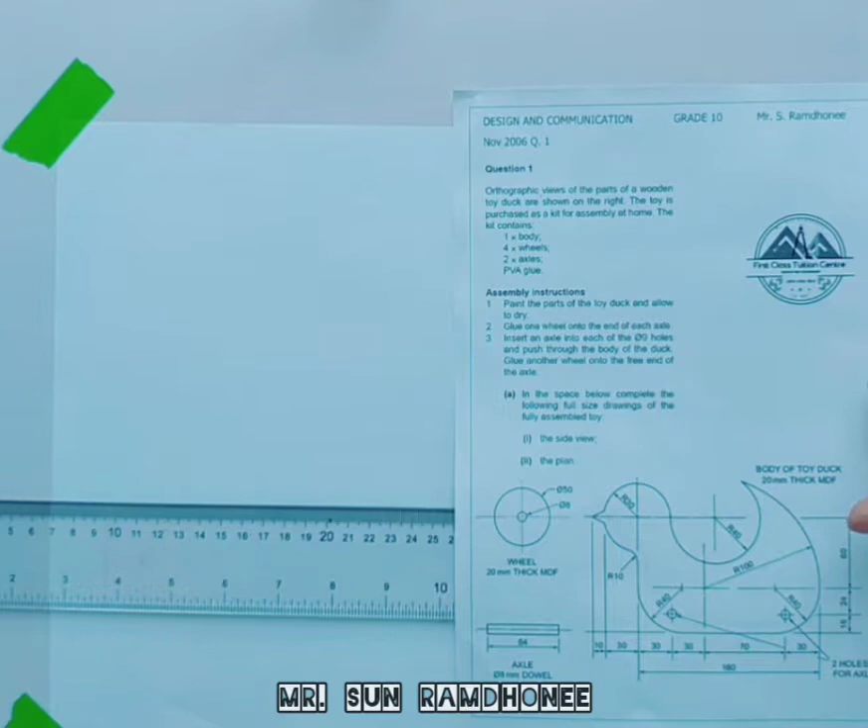In this session we are going to look at a past exam paper. The year is 2006 and the question that we are going to attempt is question 1A. So I'll give you a summary of this question.

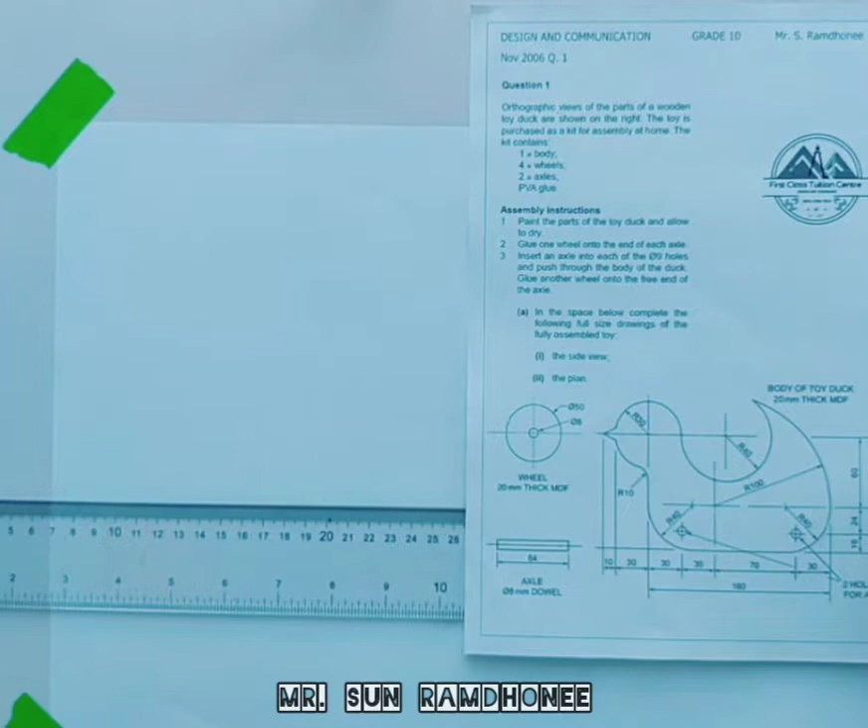You're given a toy and you have to assemble the toy, and the toy is sold as a kit, which means that it will contain the different parts that you have to put together. You have been given the body of the toy duck, you have 4 wheels, and you have 2 axles, and to join the axles to the wheels you have a PVA glue, which is an adhesive.

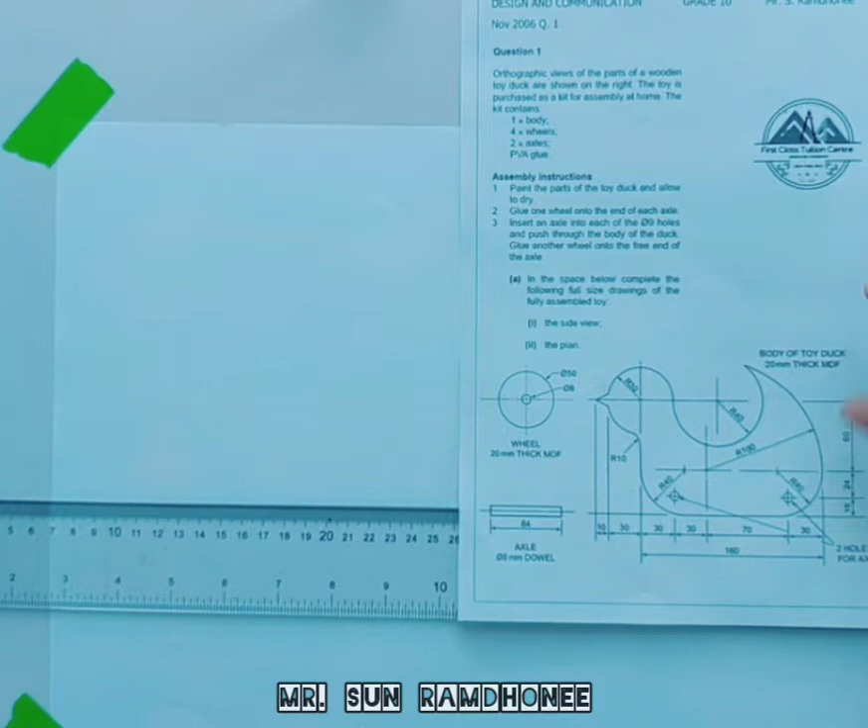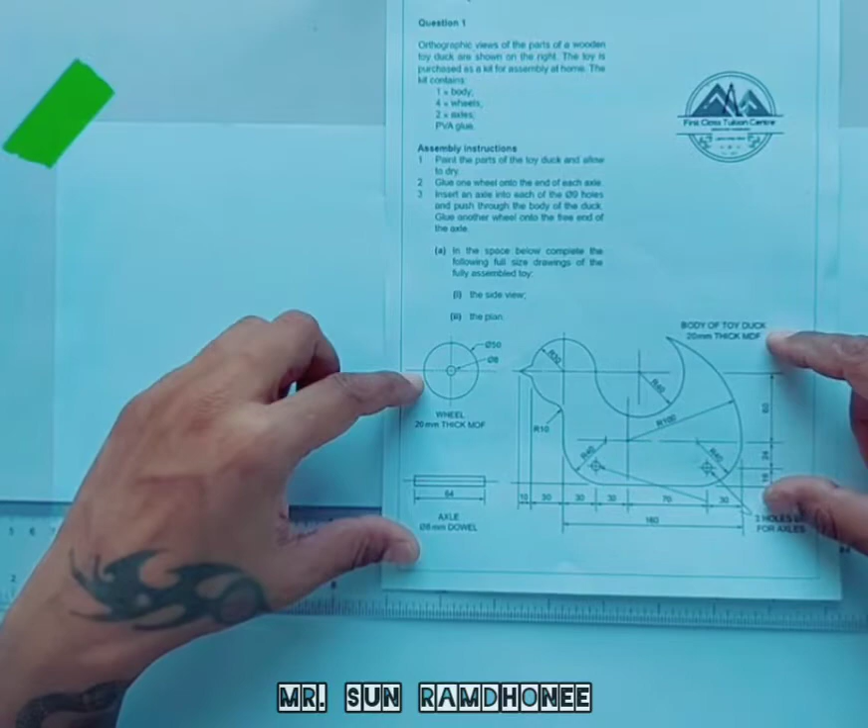So in part A, you have been asked to draw the orthographic views showing the fully assembled toy. This is the side view, and there are 2 holes in which we are going to insert this dowel, and then finally we are also going to insert the wheels at the end of the dowels. We have to show the side view and the top view. Here it is written the plan.

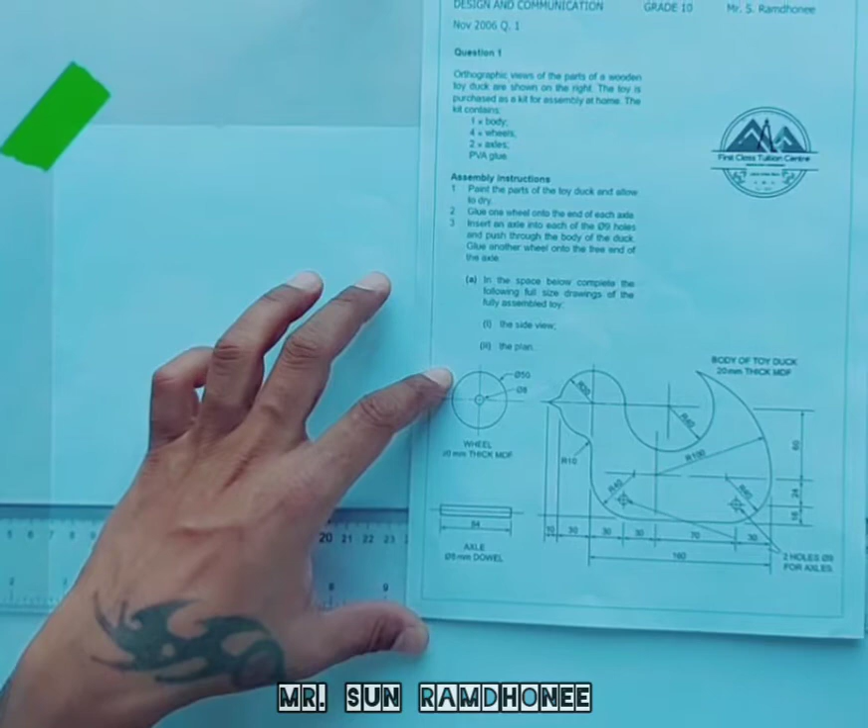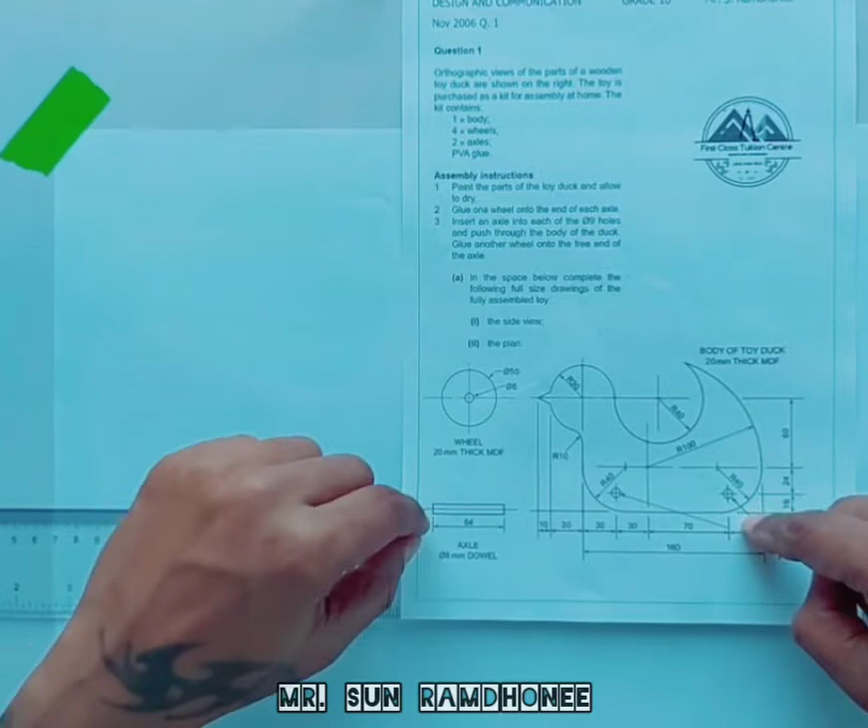In the original question, there is space right below the question. Since I have customized this question so I can print it, we are going to start off with how it was pre-printed in the original question. In the original question paper, you have to start the drawing from this wheel, which means that this wheel should be drawn here, and then we're going to move upwards. There will be 2 wheels which would be mounted on these axles, which should be inserted in these 2 holes.

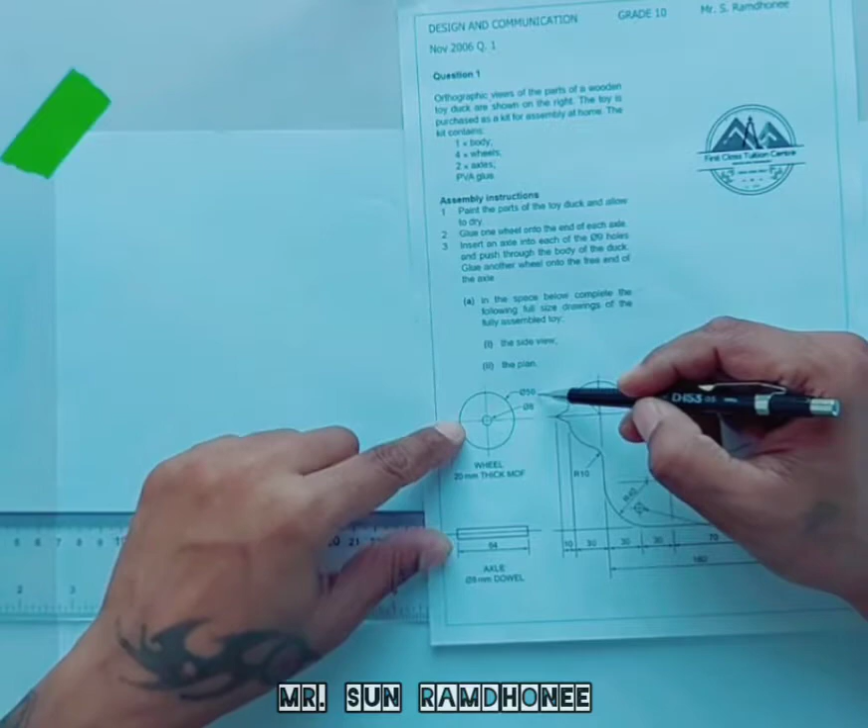So let's get started. First of all, we're going to start off the drawing with the wheel, with this one. The radius for this wheel is 25 since the diameter is 50. So I'll take my compass, I'll measure 25, and then I'm going to draw a center line. This center line is going to be horizontal.

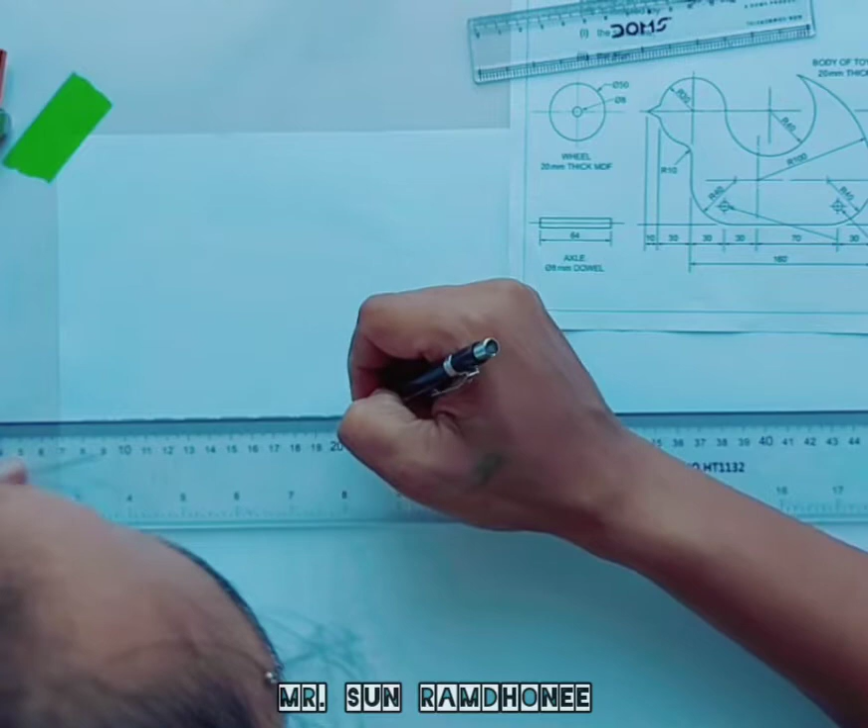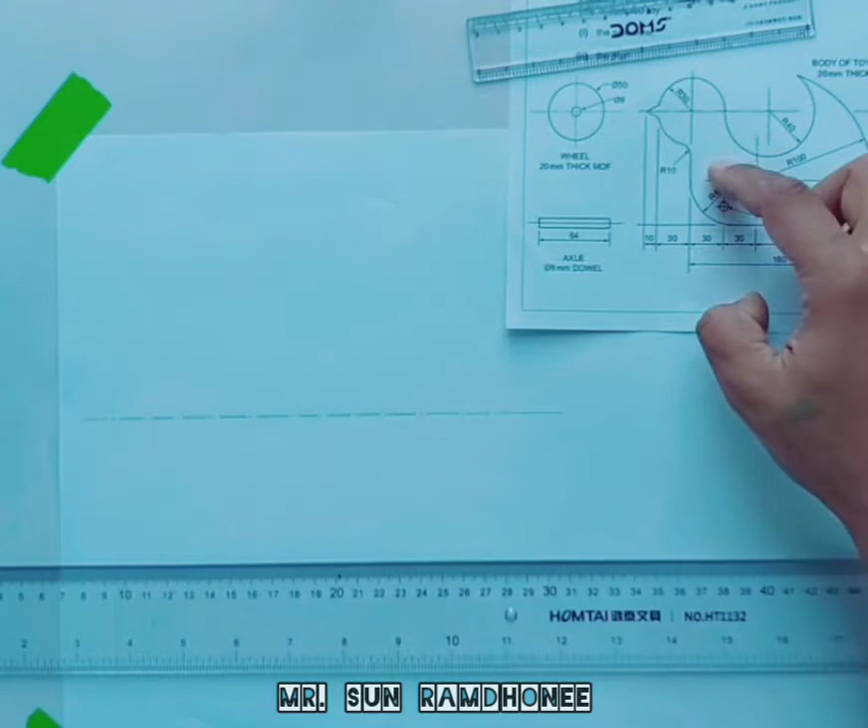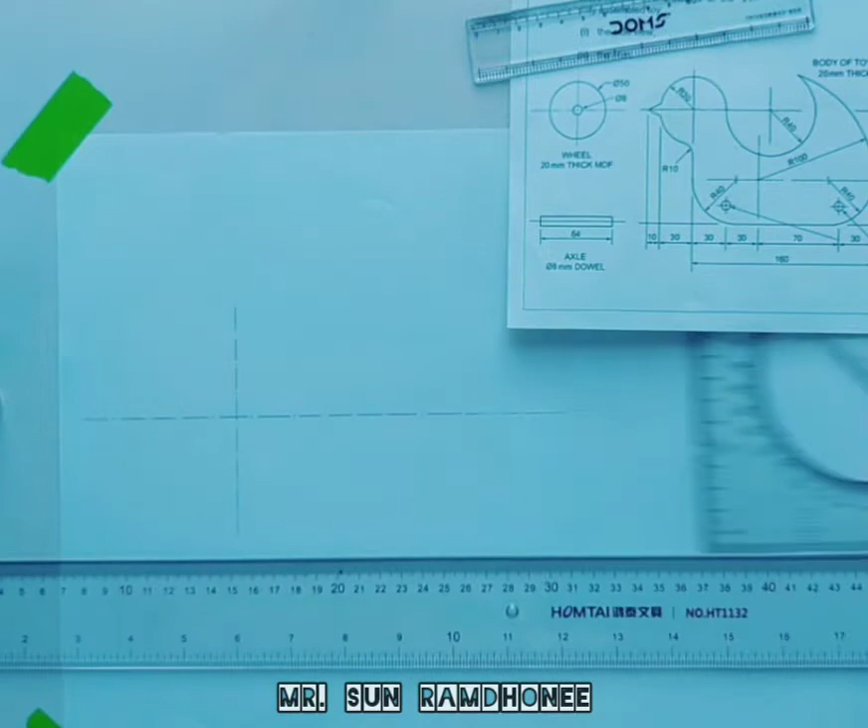Once you have drawn the center line, you have to make sure that you have sufficient space on the left side of the paper, because we're going to draw the wheel here. I have to also draw this part. So I'm going to leave sufficient space, and then I'm going to draw the vertical center line, which I'm going to place around here. And once I have drawn it, this is this point. Now I'm going to draw the wheel here.

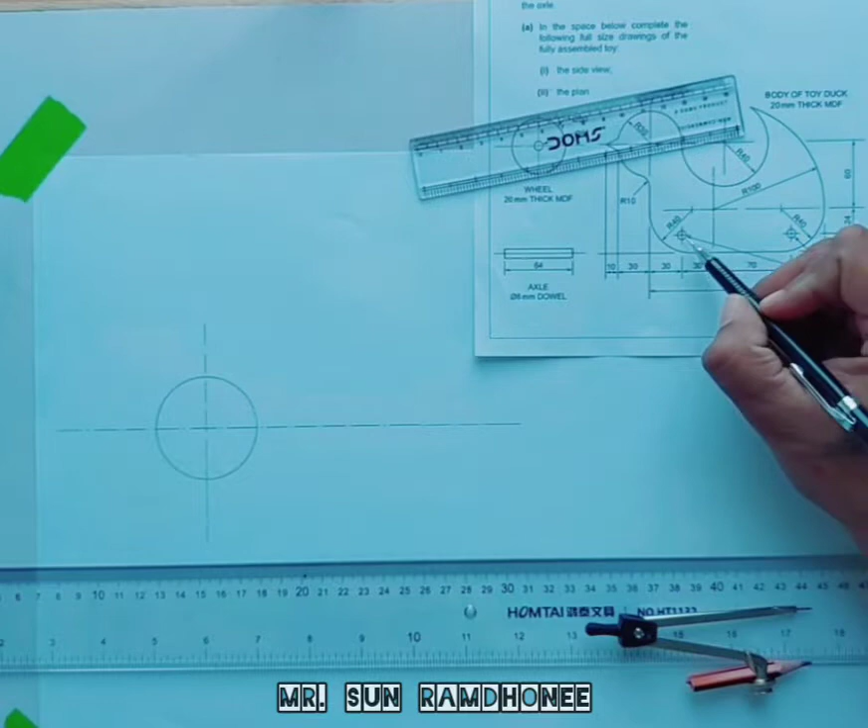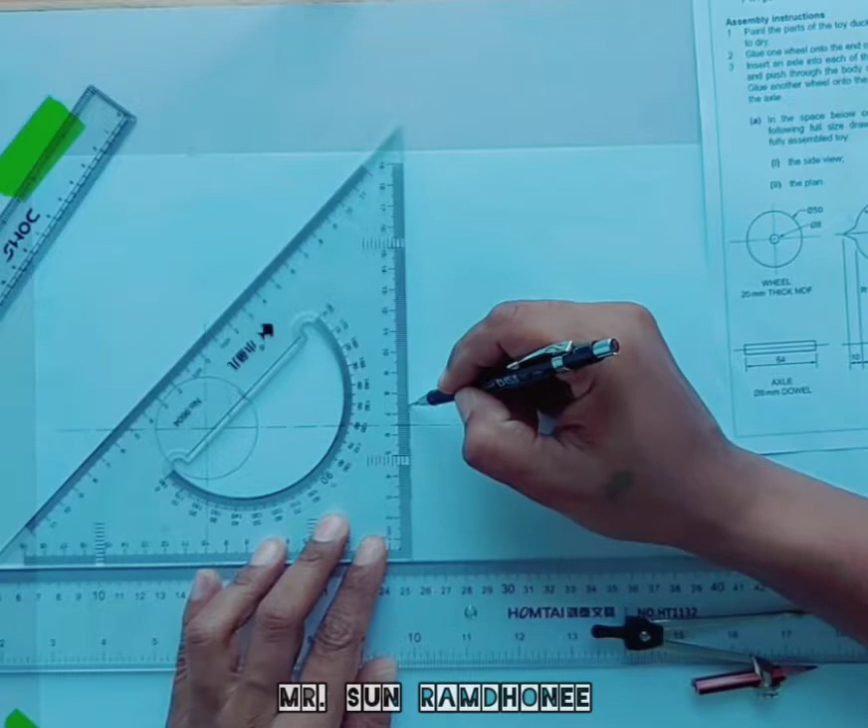The distance between the first wheel and the second wheel is 30 plus 70. So I'm going to measure 100, and I'm going to mark the location for the second wheel, which is going to be here, and then I'll draw the center line. From this center I'm going to draw the second wheel.

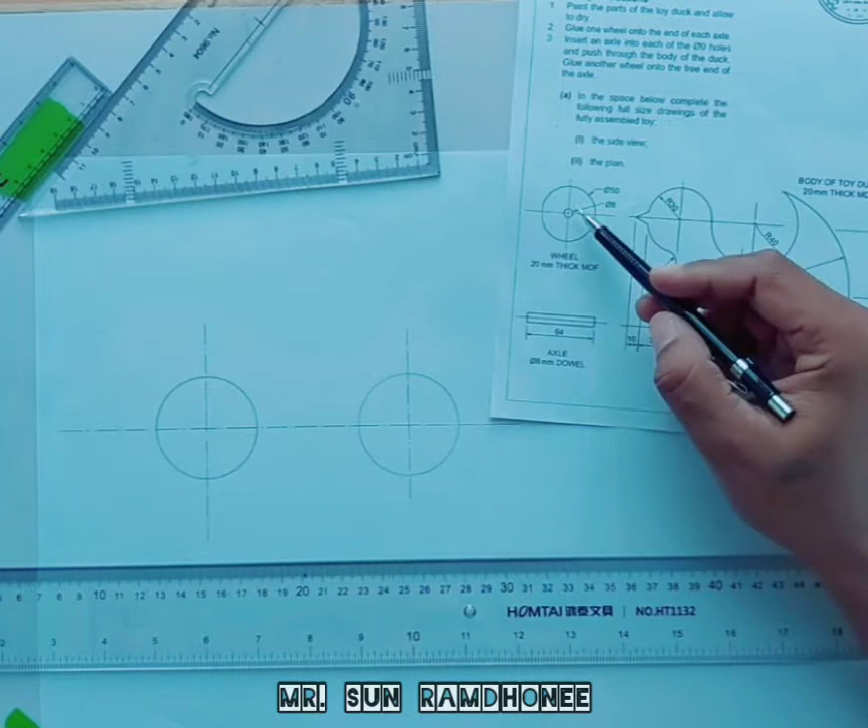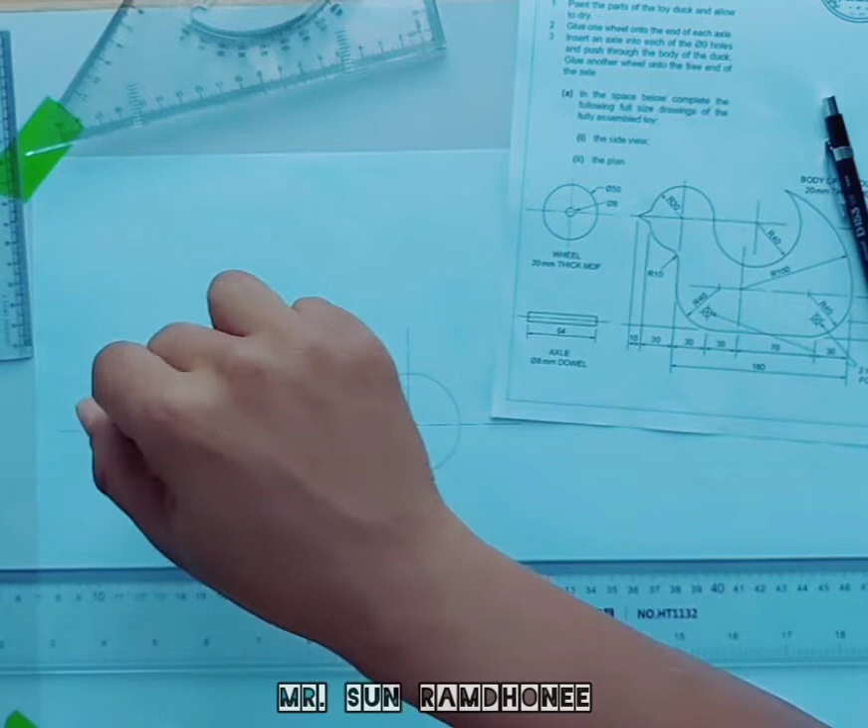Now we have to bear in mind that there is a dowel which should be inserted in this hole. So we're going to draw this circle. The radius is 8 divided by 2, which would be 4. So I measure 4 on my ruler, and then I'm going to draw the circle. One reminder here, you have to take your time to draw the smaller circles, because they tend to get distorted if you go too quickly.

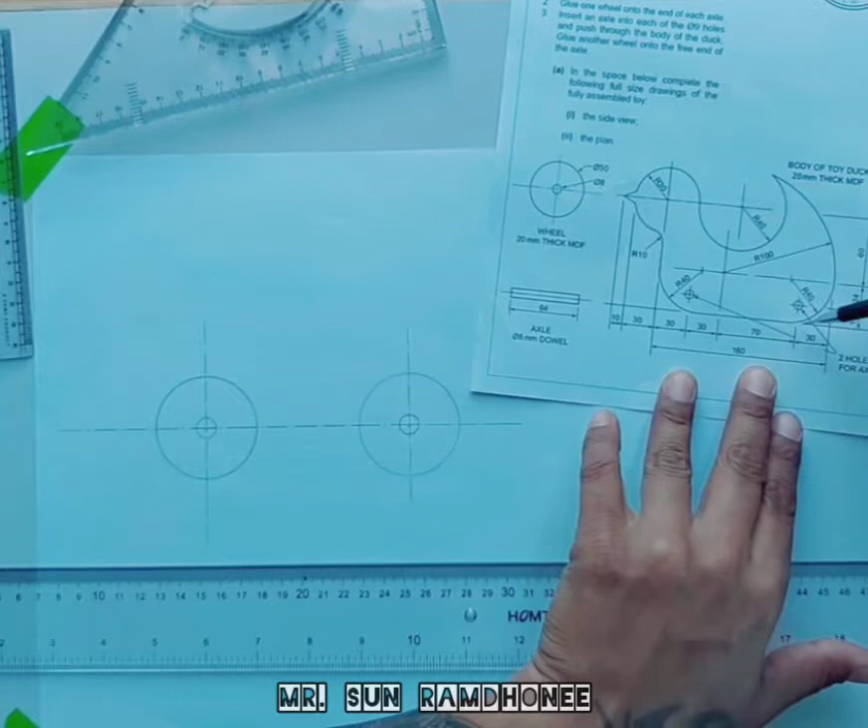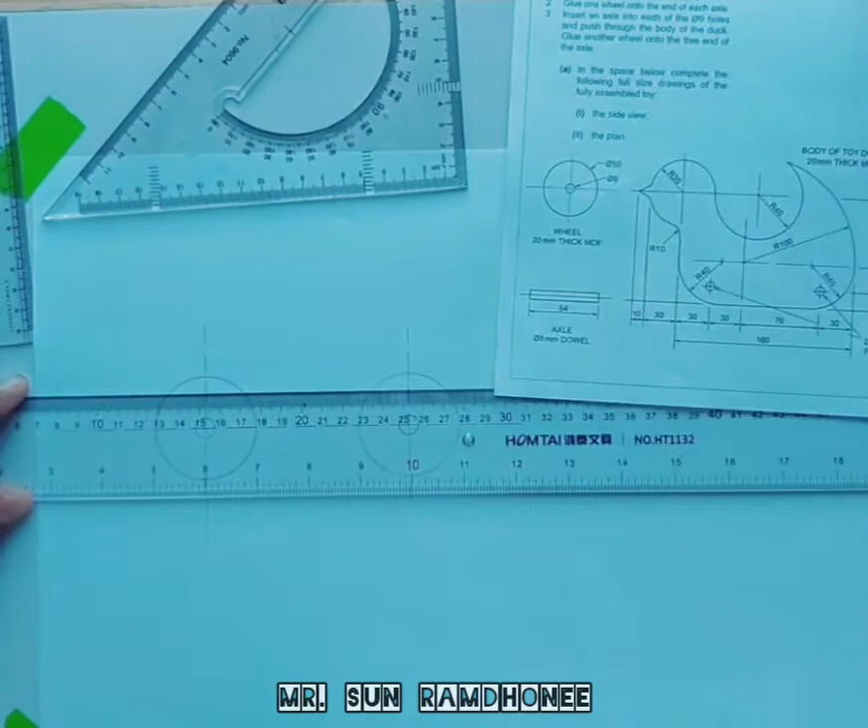Okay, once you have drawn these two circles, we are going to draw this part. The distance from this center till here is 24. I'm going to measure 24 from this point, which lies on this center, and then I will draw a horizontal line here, and this is going to be a very faint line. After drawing this line,

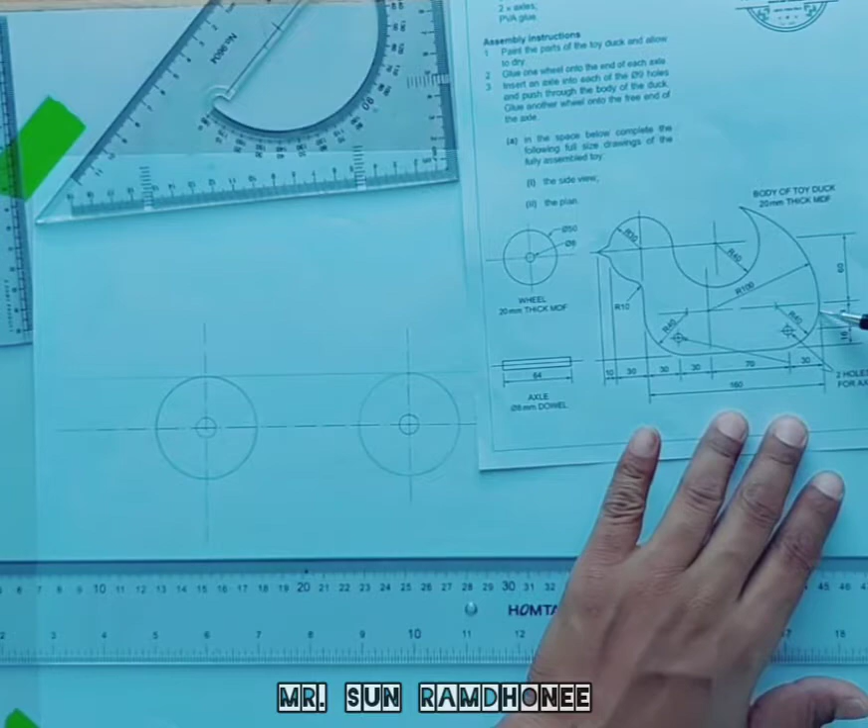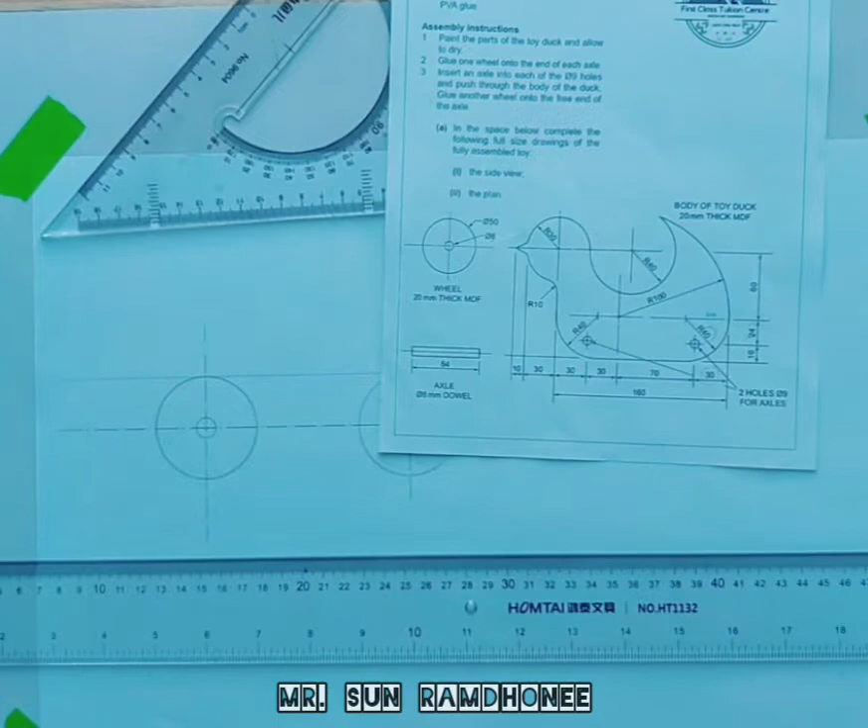I have to measure 30 millimeters from here to locate this center. The distance from this center till this extremity is 30 millimeters. So I'm going to measure 30 millimeters from this center, and then I'm going to draw a very faint line here. Distance from this point till the center is 40, since the radius is 40. So I'll measure 40 here. I will mark the position, the center, which is going to be here, and I'm going to do the same for the left part.

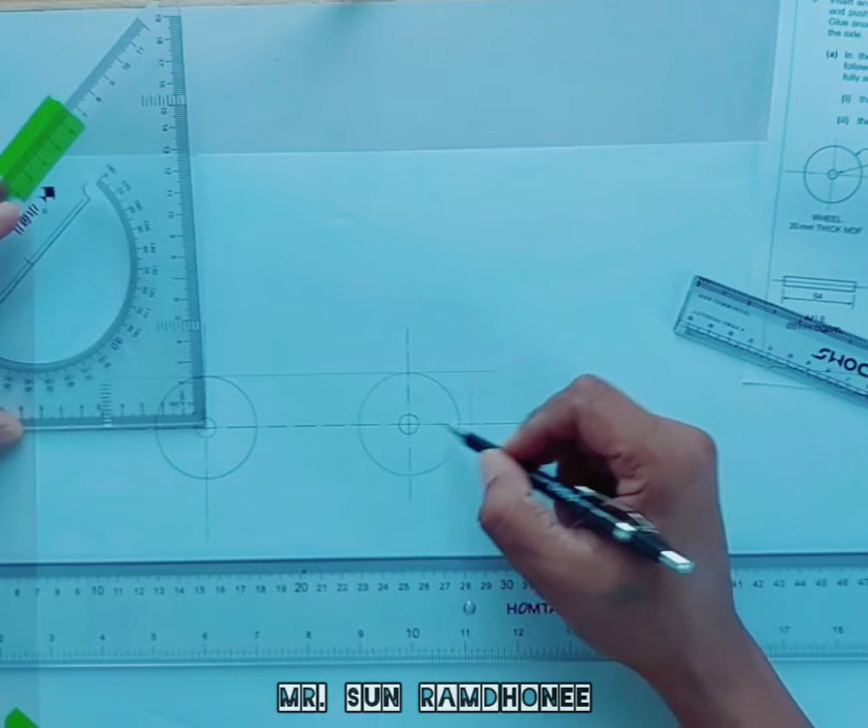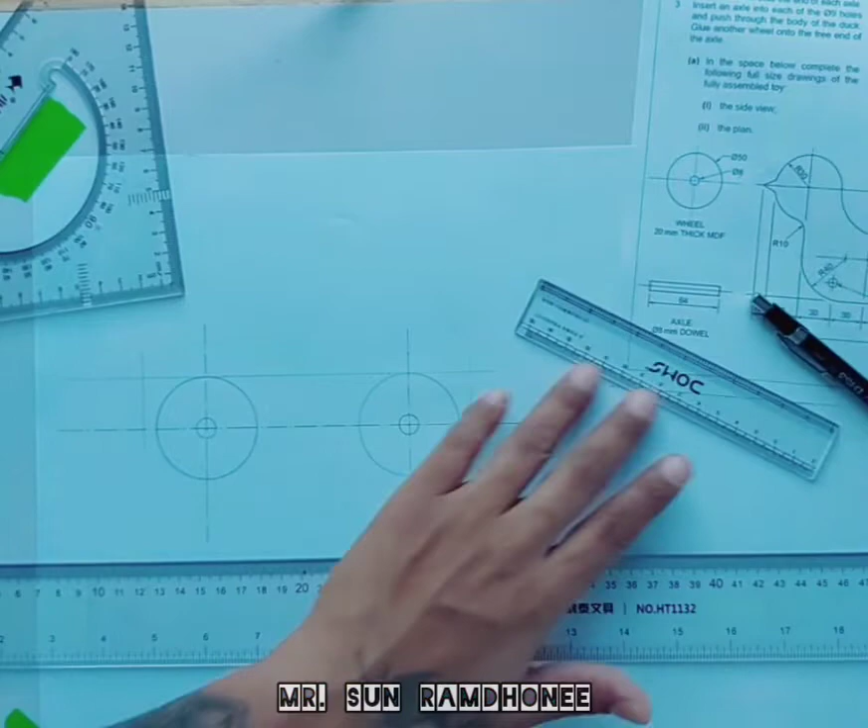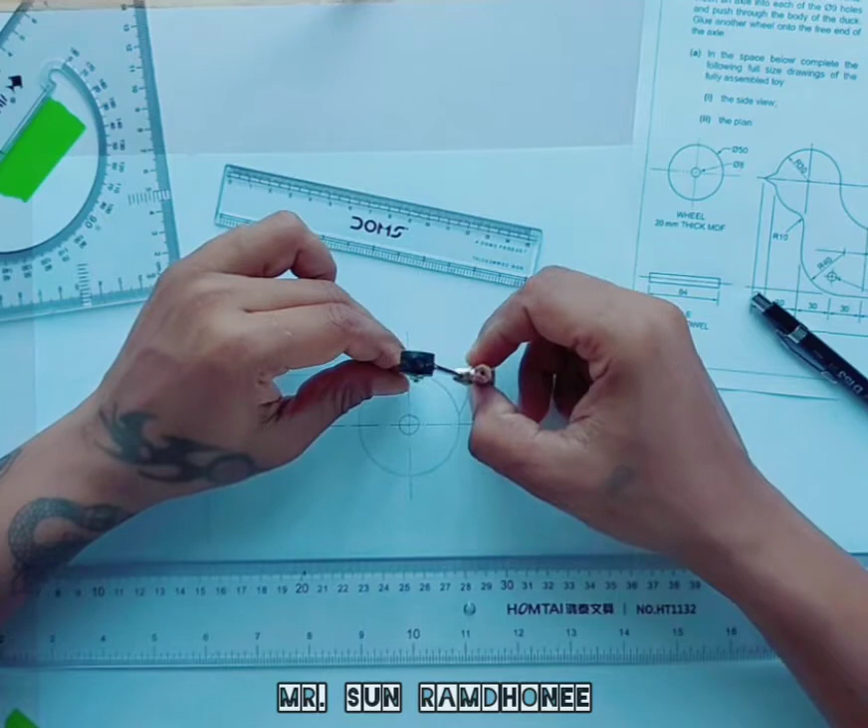So I'll measure this distance, which is 30, draw a vertical line like this, then measure 40 millimeters to locate this center. Once I have obtained these 2 points, I will measure 40 millimeters on my ruler. Then I'm going to draw an arc. The reason I stopped this arc here is because it is not going to be visible behind the wheels, so it is irrelevant to draw it.

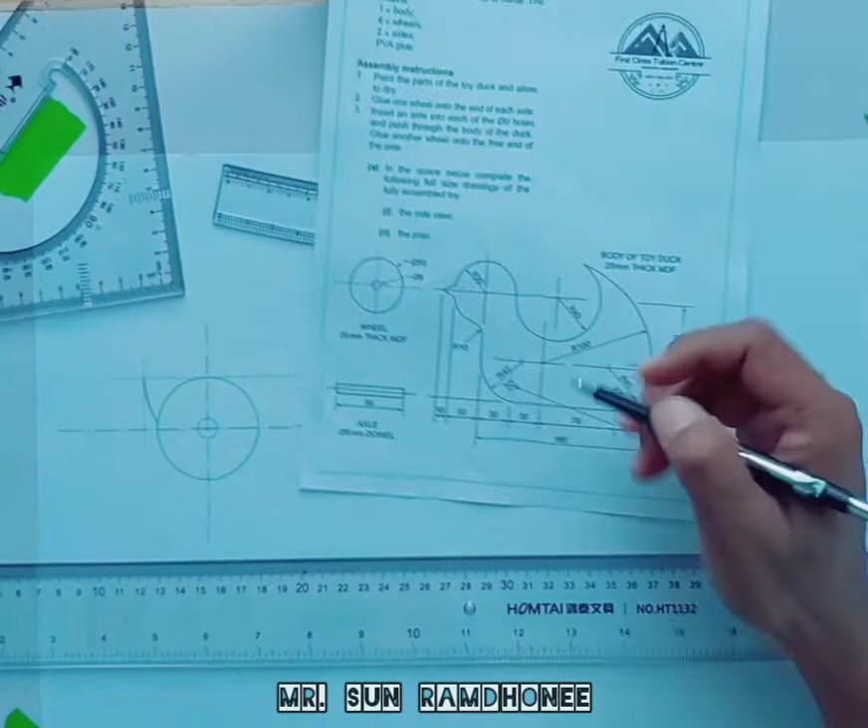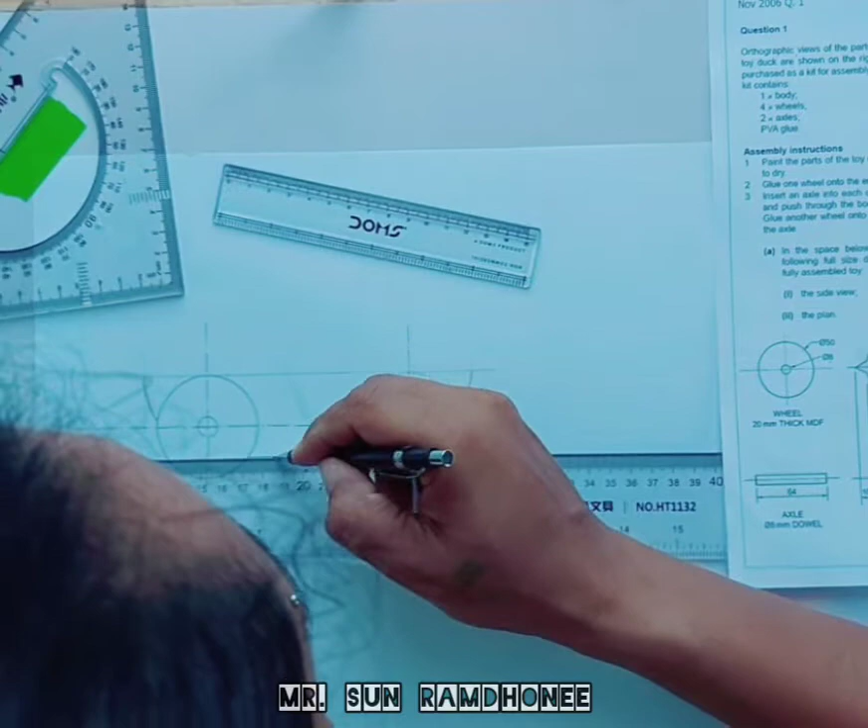The distance from here till here is 40, so I'm going to mark this line. I'll draw a small arc here and here so that these 2 lines are parallel, and then finally I'm going to draw a line. And this part we have completed.

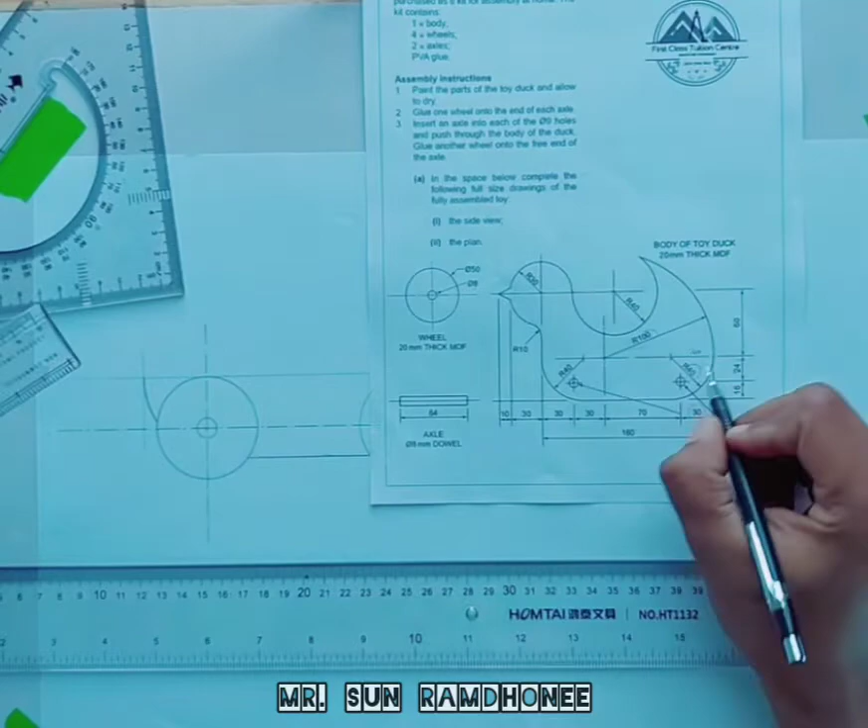Now we're going to move upwards. The radius of this arc is 100. So we can draw this arc by measuring 100 from this point. So we measure 100 from this point to obtain the center here, and then we measure 100 on our ruler, and then we draw this arc.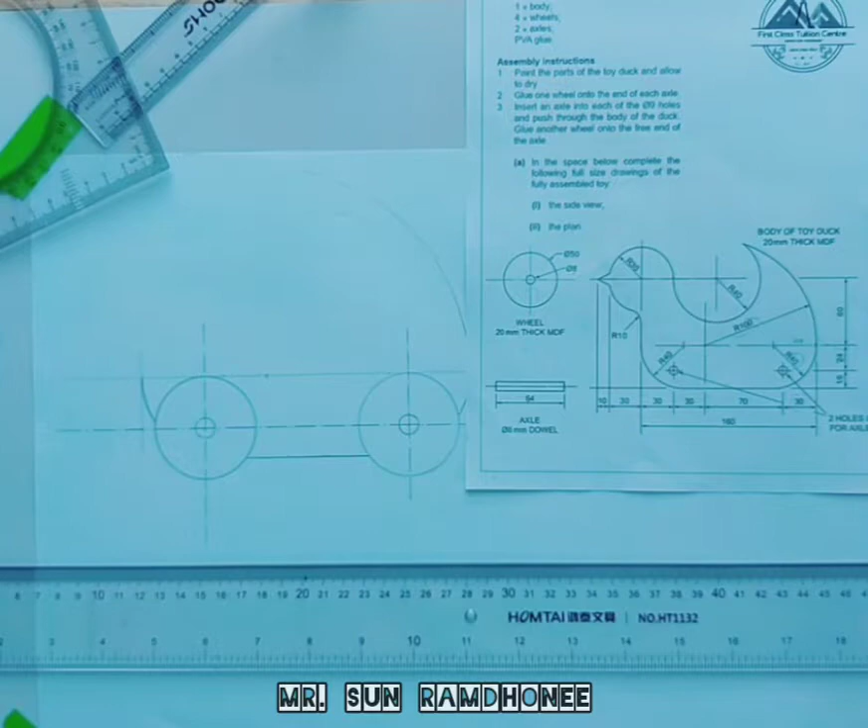So I leave it like this. Now we are going to move to the left hand side. The distance from here till the center of this circle is 60 plus 24 plus 16, which is equal to 100. So I'll measure 10 centimeters from here and draw a very faint vertical line, and then mark it. So we have obtained the center.

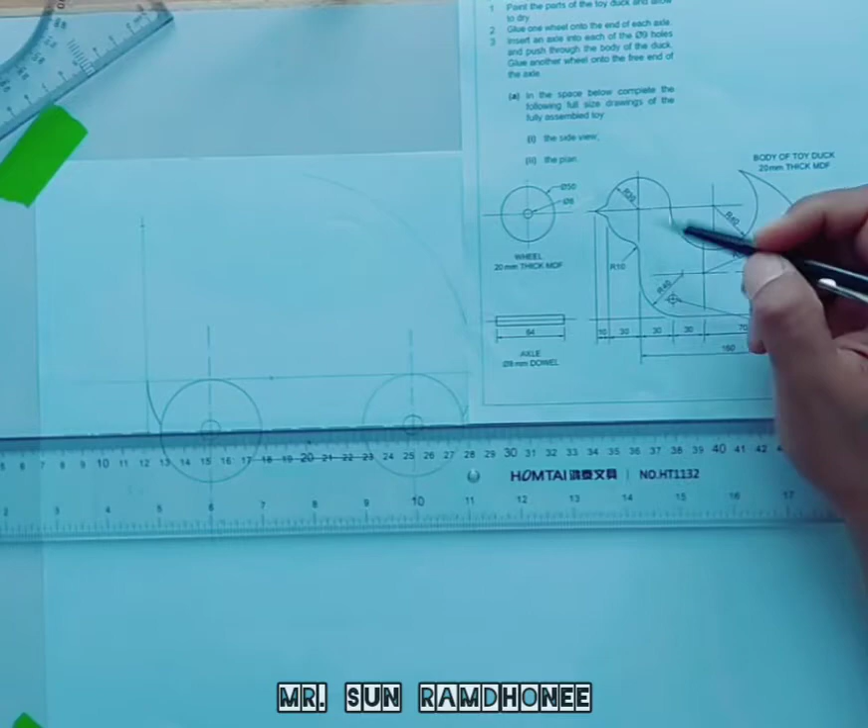And now we are going to draw this circle. The radius for this circle is 30, so we measure 30 on our ruler. And then we draw this circle. This also we have to draw as a very faint circle for the time being. We have this line and we have this arc.

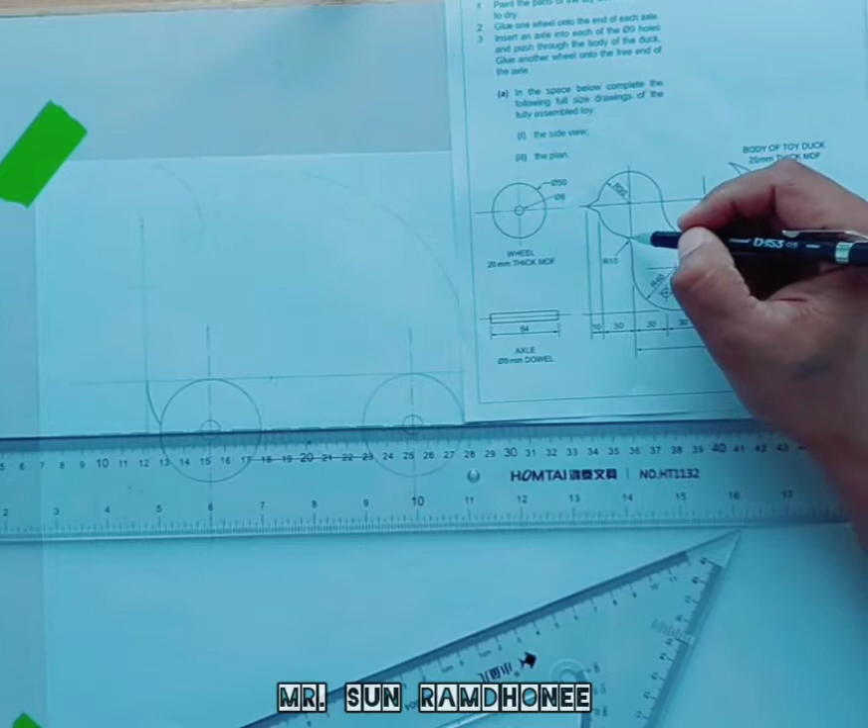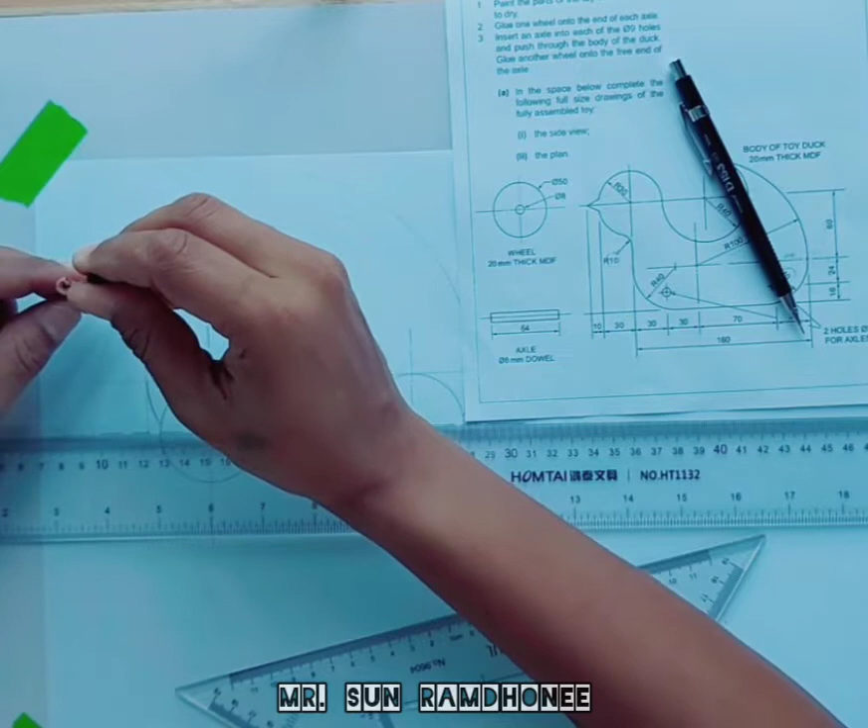What we have to do first of all is draw an arc from where it touches the center line, and the radius for this arc is 10 millimeters. So let's do it. First of all, I measure 10 millimeters, and from this center line I draw an arc here. I draw a second arc here. Now I'll draw one arc here and then one more arc here. We have obtained the center for this arc.

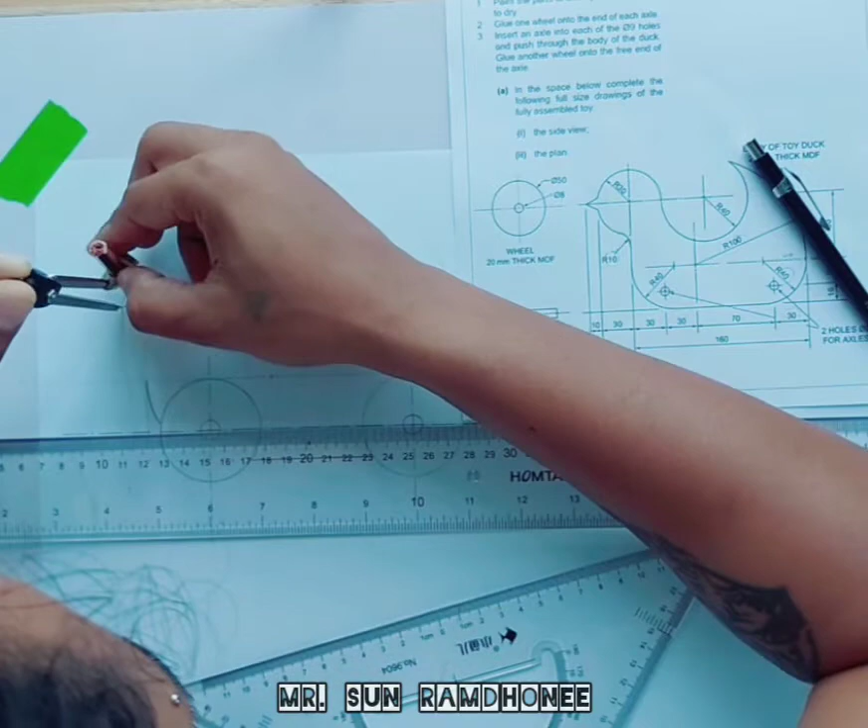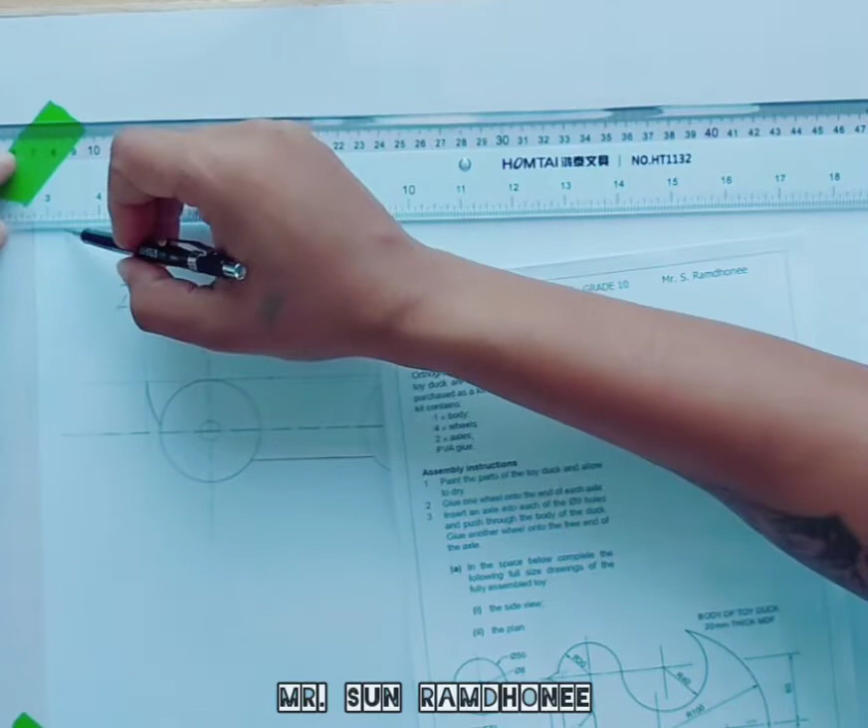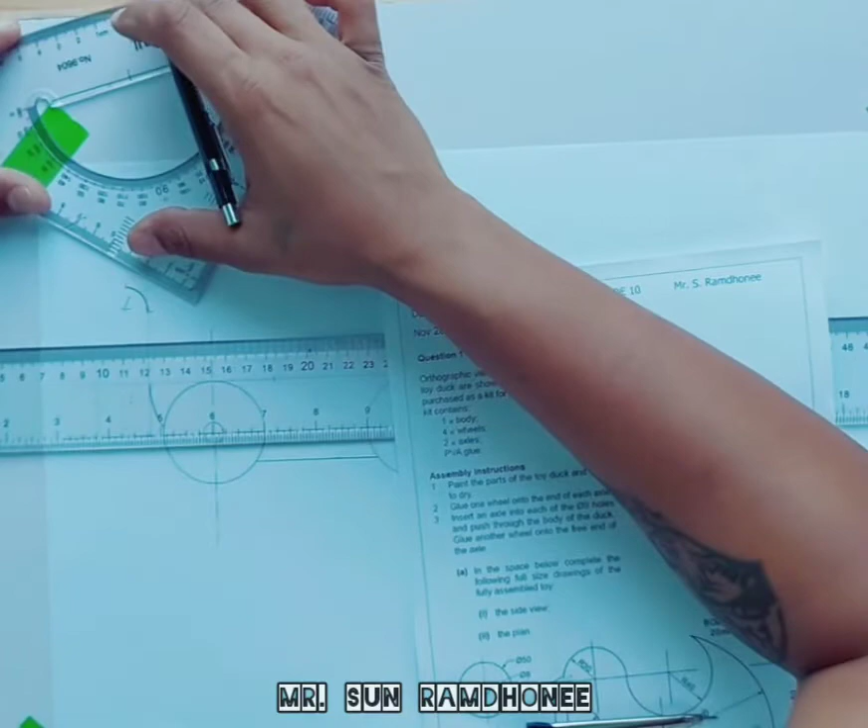Once you have drawn this arc, we are going to draw this part, which is the beak of this duck. The distance is 10, so I assume that this distance is also 10. So I draw a horizontal line here, and I'll measure 5 millimeters on my compass, and then I'll draw an arc here and here, and also I'll measure 10 millimeters here, and then finally I'm going to draw the beak. So we are almost done with this part.

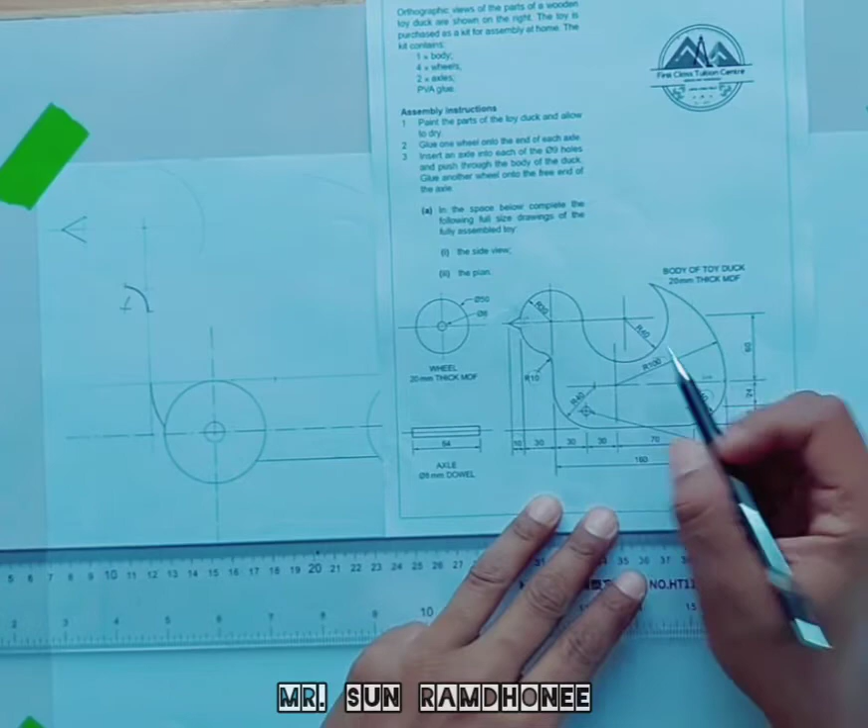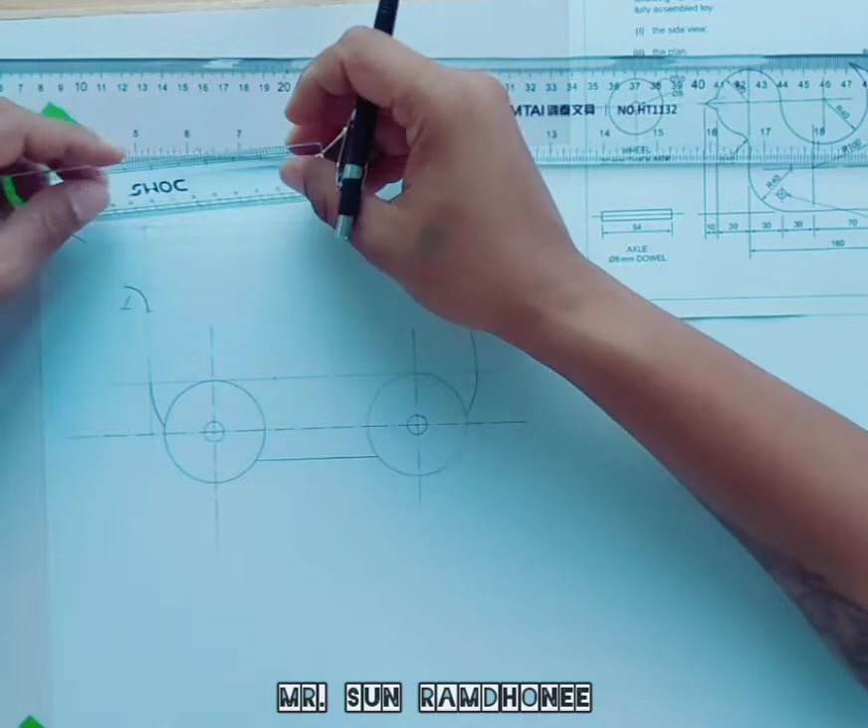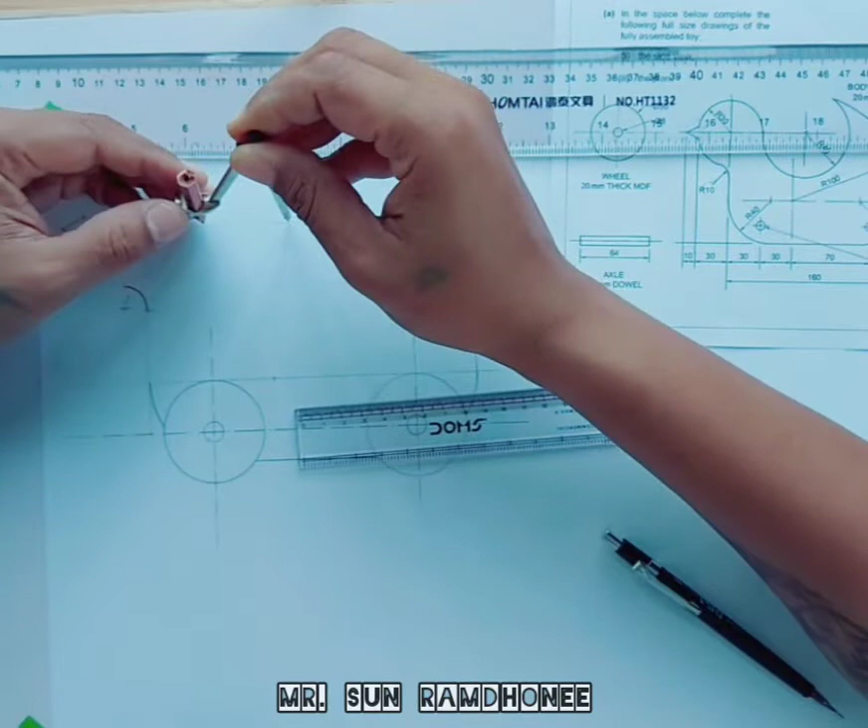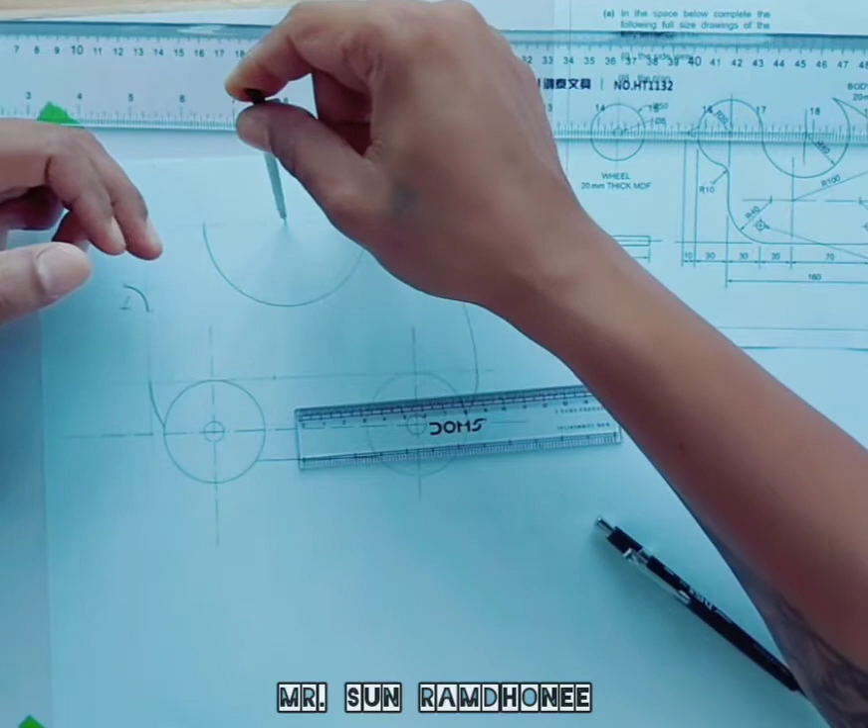Now we have to draw this arc. To locate the center for this arc, we can measure 30 plus 40, which is going to give us 70. So first of all, let me stretch this line, and then here we can measure 70. From this point, I'm going to draw an arc which has a radius of 40 millimeters. So now we are mostly done with this top part. I'm going to outline it later on.

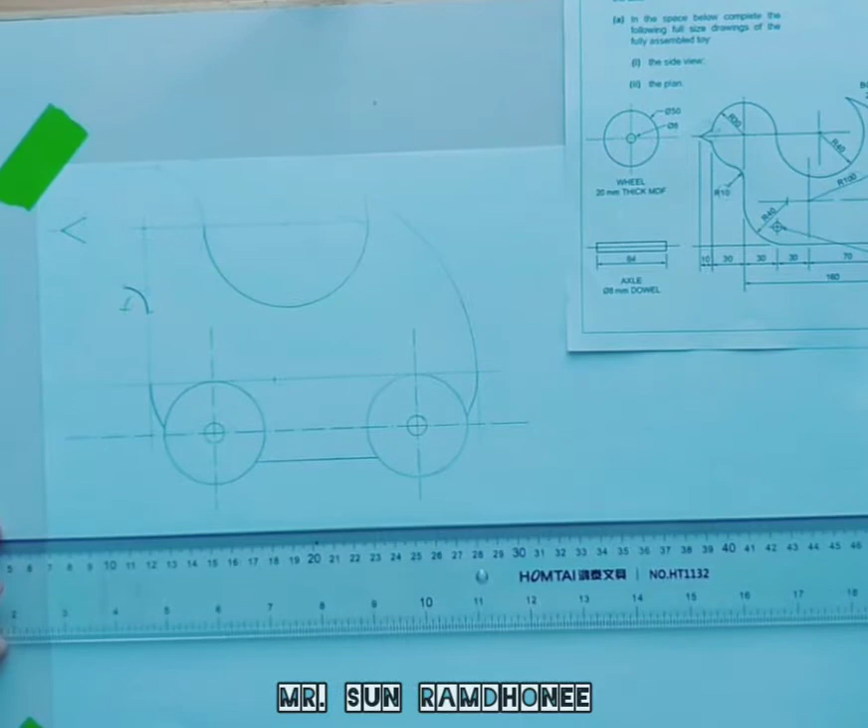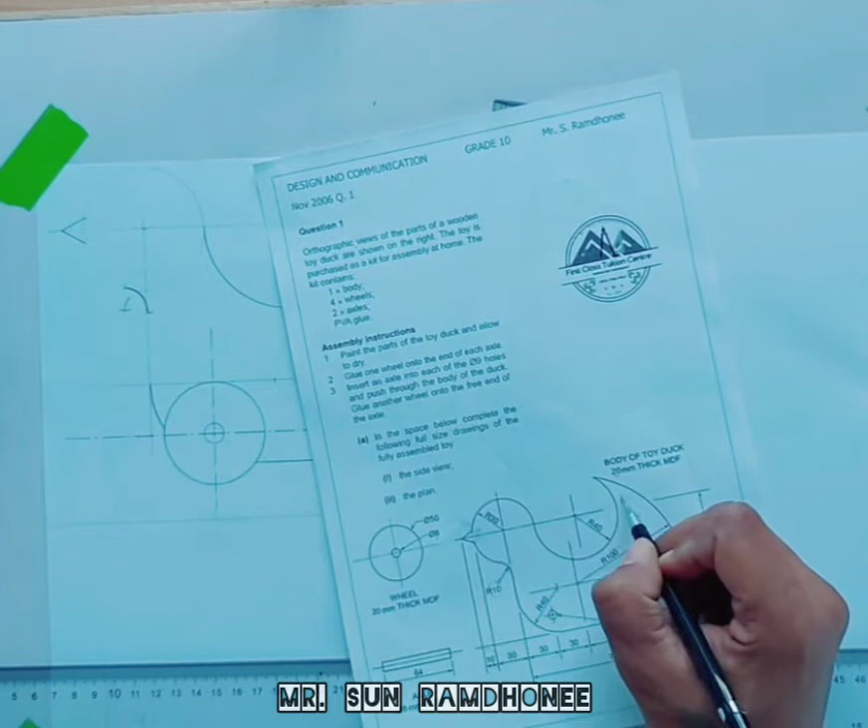Let us move to the plan. So here we are going to leave around 15 millimeters, and then we are going to start off the drawing. To draw the plan, we have to take into consideration the thickness of this body as well as the thickness of the wheels. The catching point in this question is that the axle is 64 millimeters.

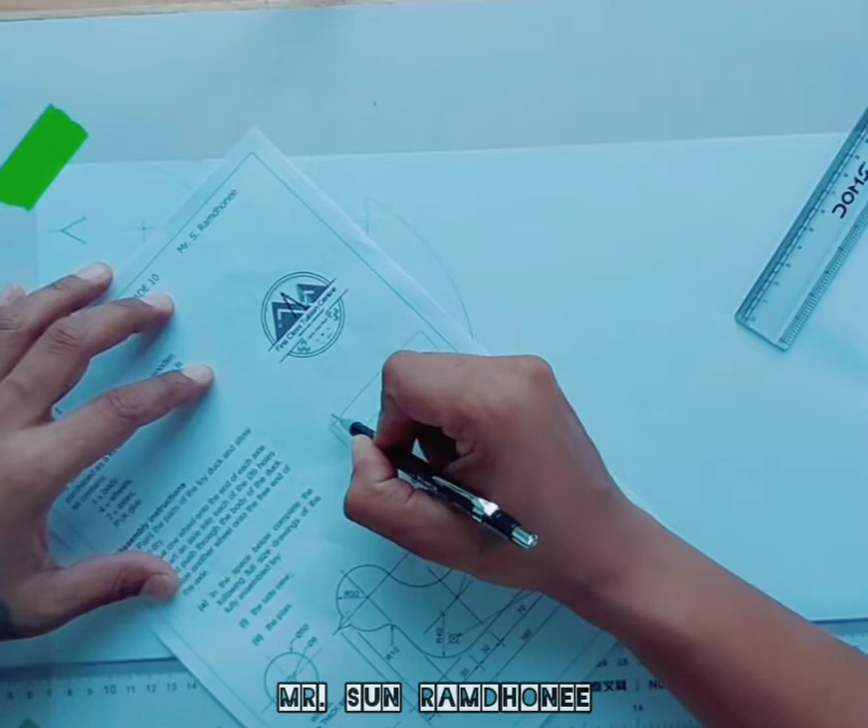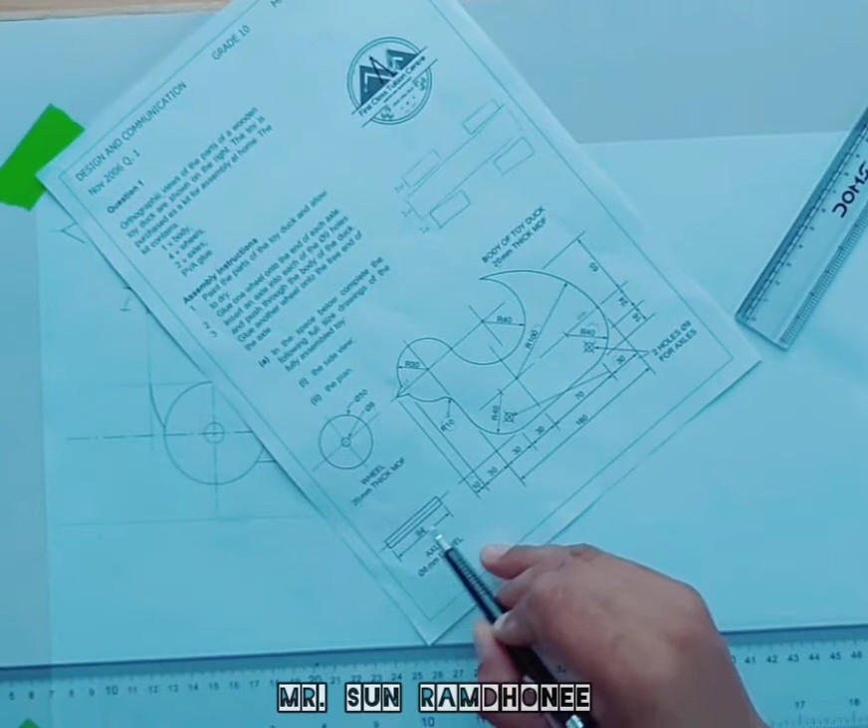If we sketch this, this is the body of the duck from the top view. We have to draw the wheels. One would be here, the second one here, the third one and the fourth one here. When we sum these distances, it gives us 60 millimeters. Since we have been given the dowel which has the length of 64, it means that 2 millimeters will be here and 2 millimeters here. So the distance from this point till here is 64. We're going to measure 64.

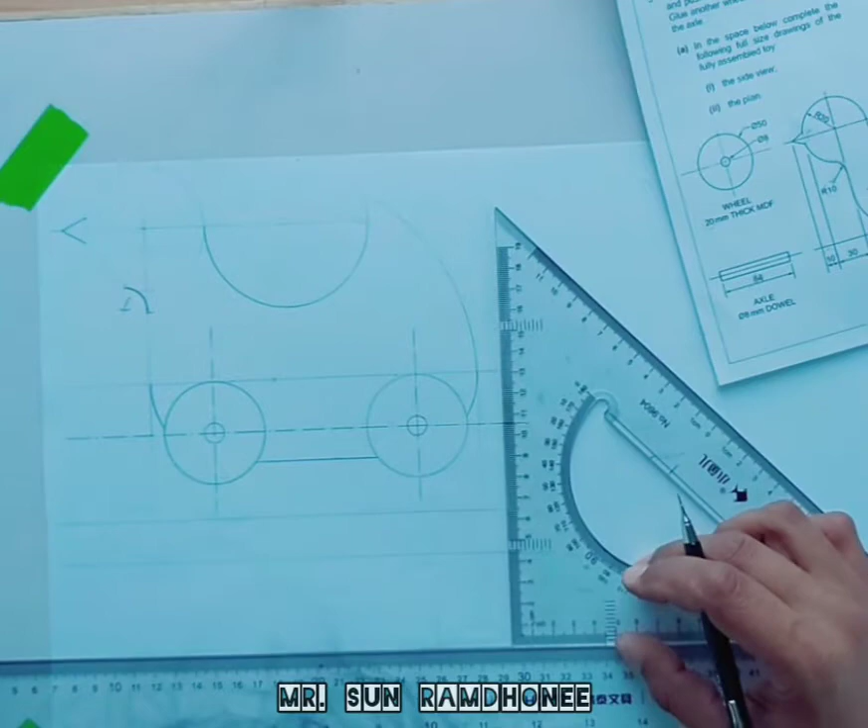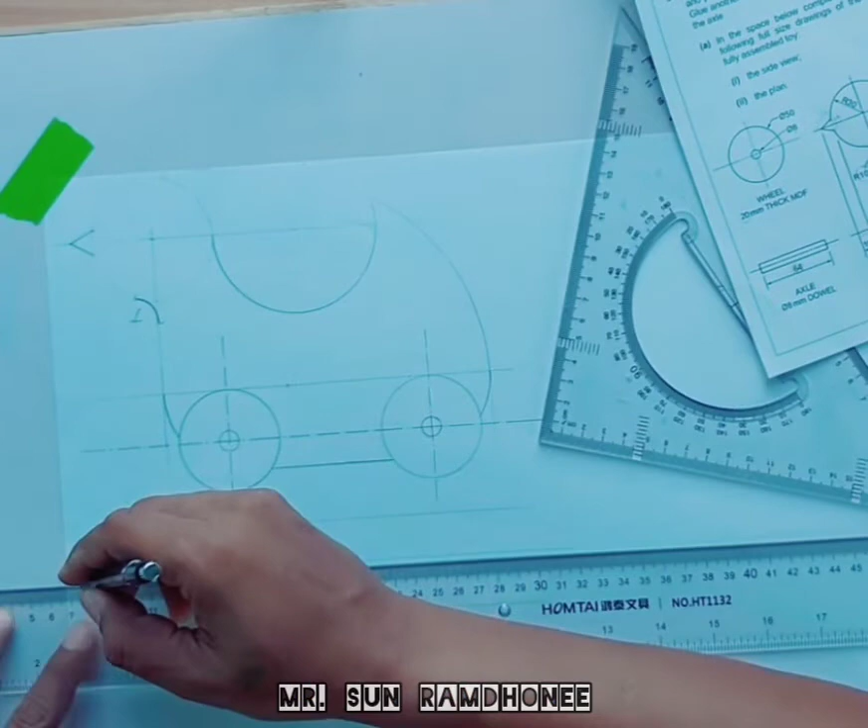And then we are going to draw another faint line. We are going to draw a line here. We have to measure 20 millimeters, and again draw another line here, which would be 20 millimeters. So this space caters for the wheels. Next, we have to add 2 millimeters here. These 2 millimeters are for the space that we have to leave between the wheels and the body.

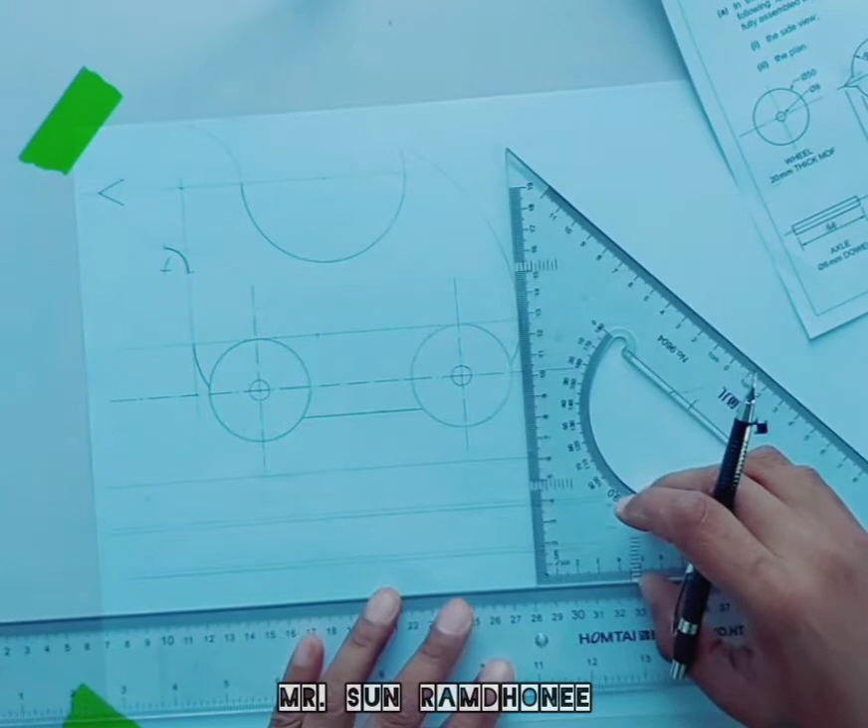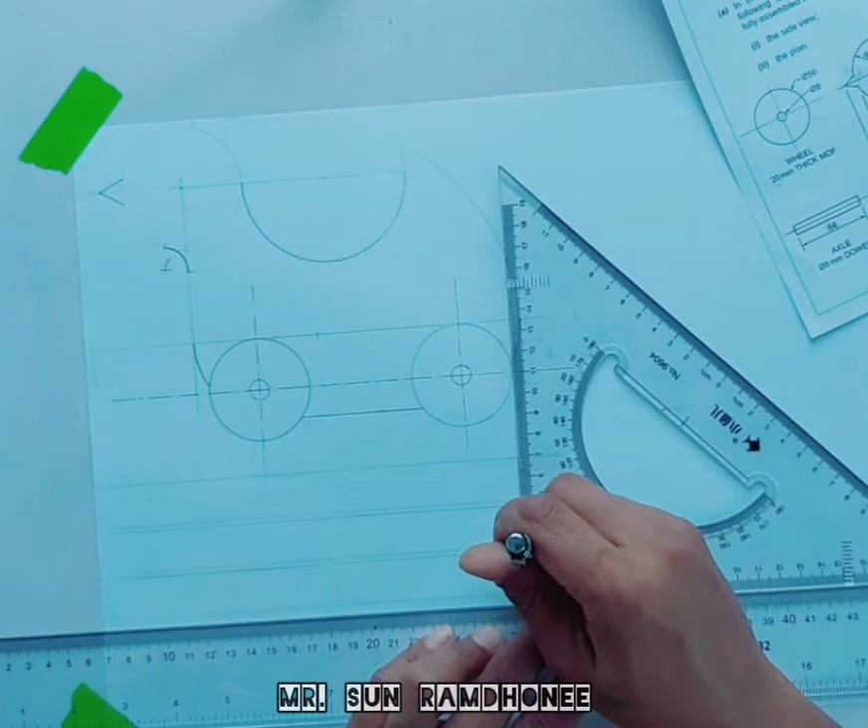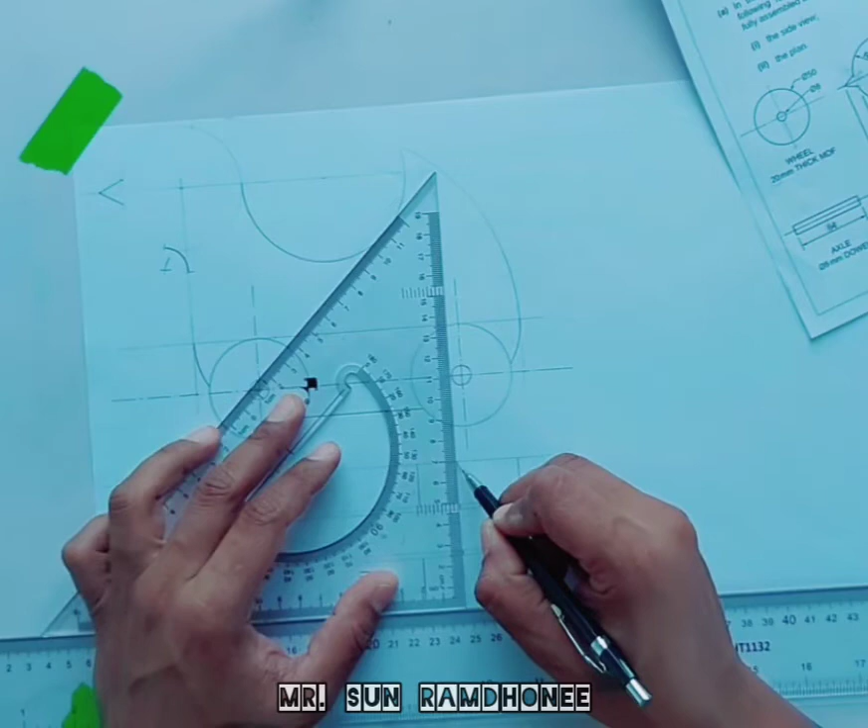We know that the end of the body will be here, so we draw a line here. The position for the wheel is here. So this is the position for the first wheel. I'm going to draw the axle, which will appear here and here, as well as here and here. Since the axle will not be visible through the wheel, I'm going to draw broken lines here. This will represent that the axle has been inserted,

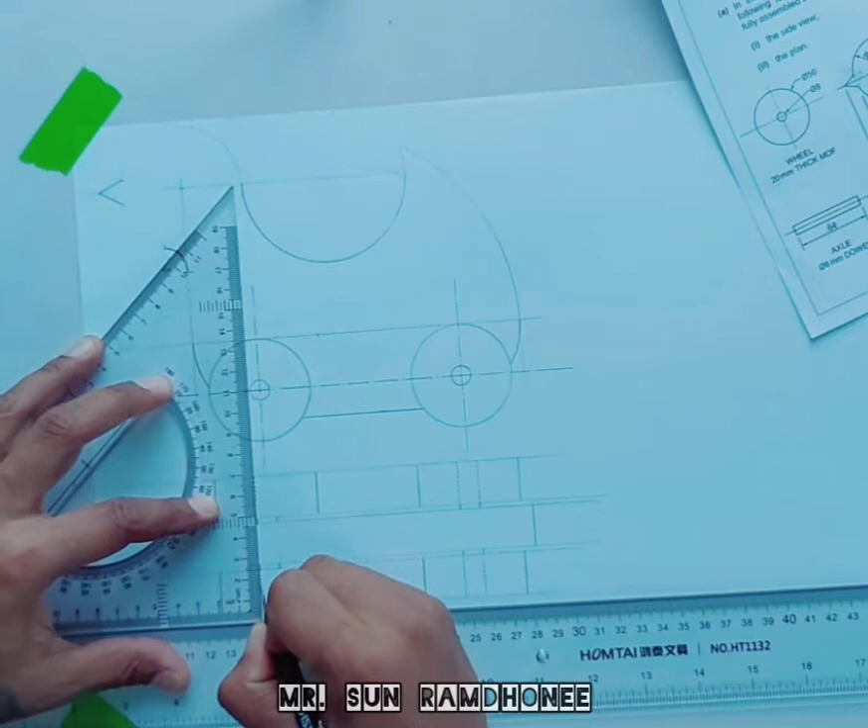and I do the same for the other wheel. Okay, now I'm going to repeat the same step for the wheel here, and draw the line here. The axle will be here and here, as well as here and here, and I'm going to draw the broken lines, which represent the dowel or the axle which has been inserted inside the wheel.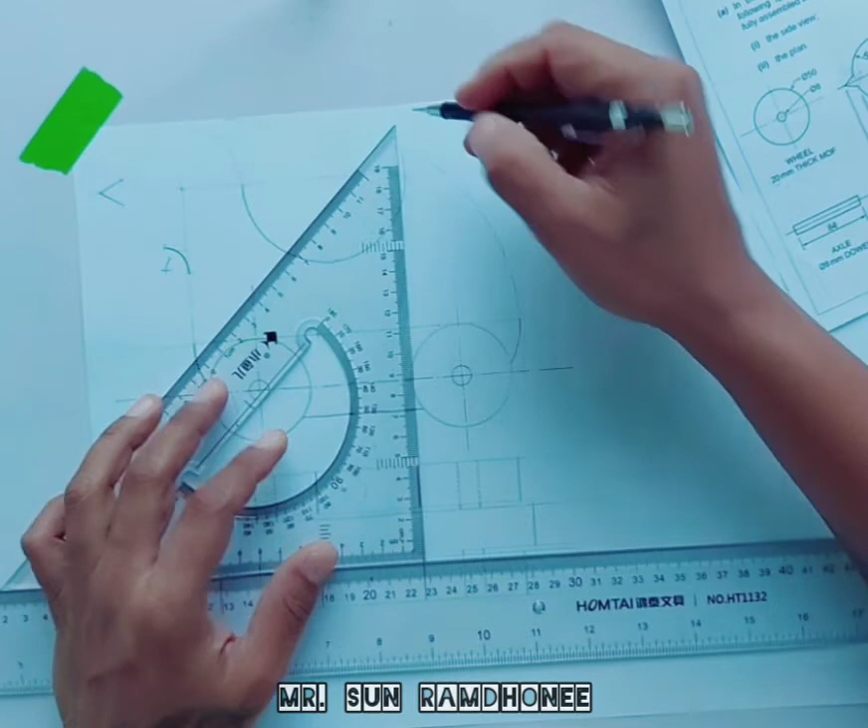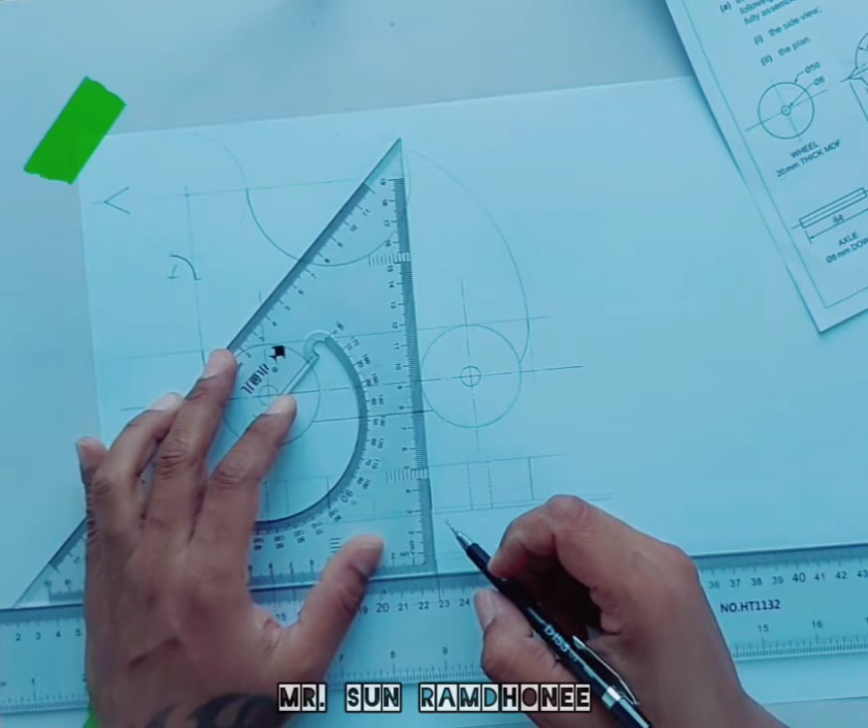From the top, from the plan, this part will be visible, which means that if we draw a vertical line, only this part will be visible. So I draw it here. Coincidentally, it will be slightly on the same line as the wheel. And then this part will be visible, so I draw the line here.

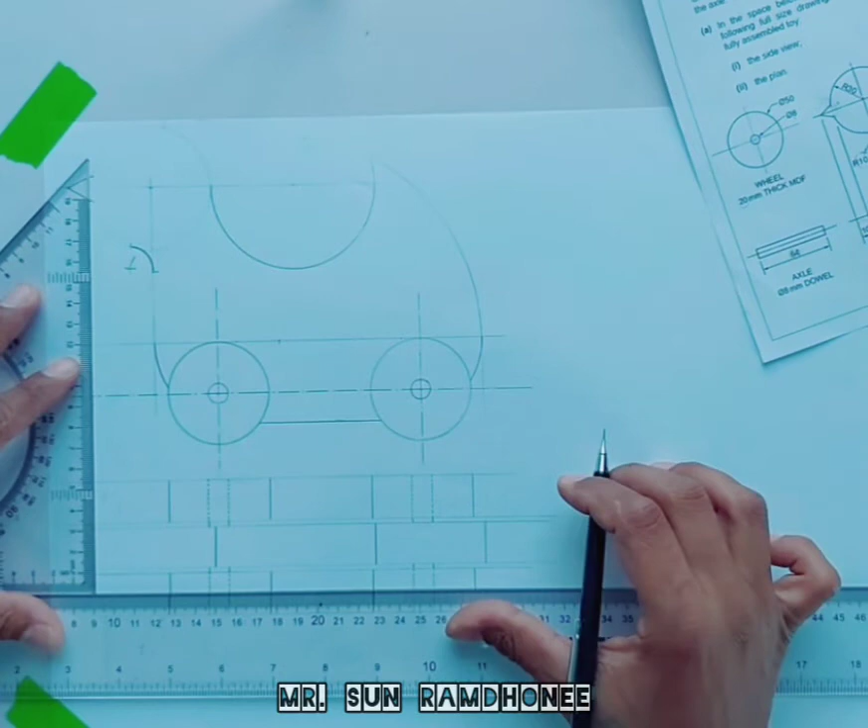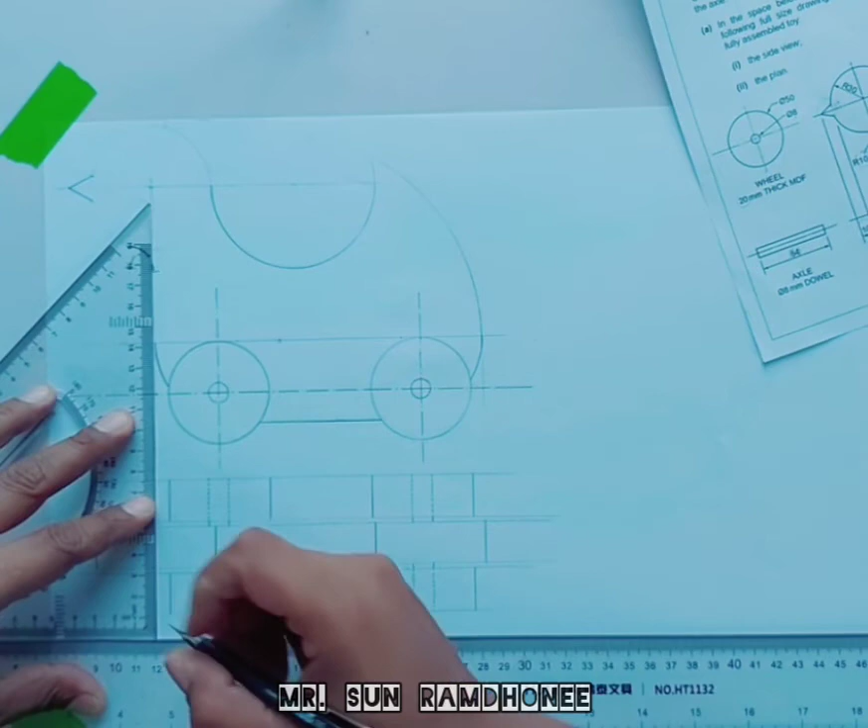And then finally, we're going to see the beak of the duck, which will be here, and here. One more part that we have to add is that when we look from the top, this part will not be visible, so we have to extend this by drawing a broken line. Now we have completed the side view and the plan. I'm now going to outline the drawing.

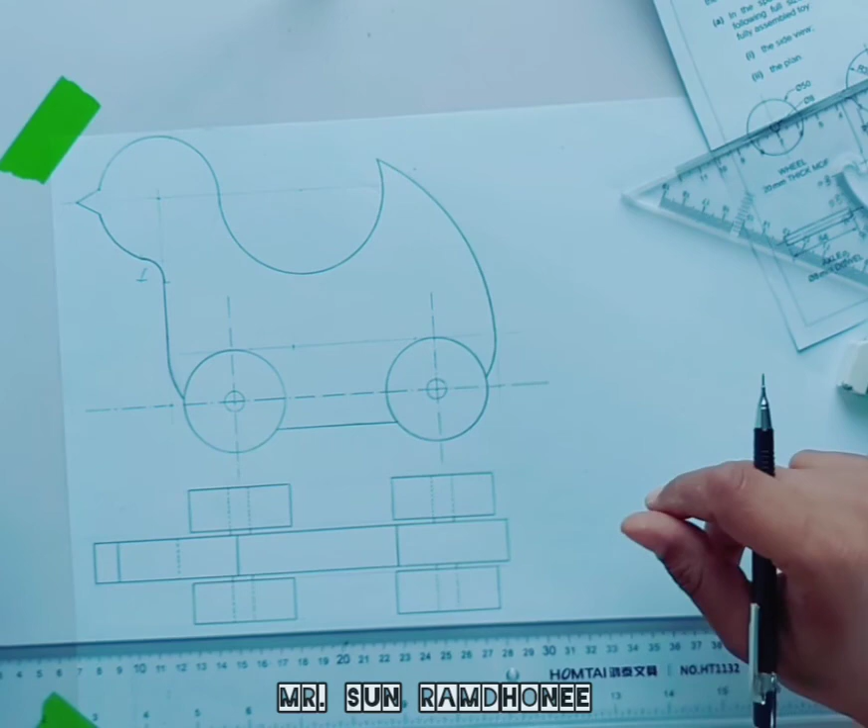So here you are, the final drawing, and as you can see there are certain lines which I did not erase because the question paper asks you at the bottom not to erase construction lines.